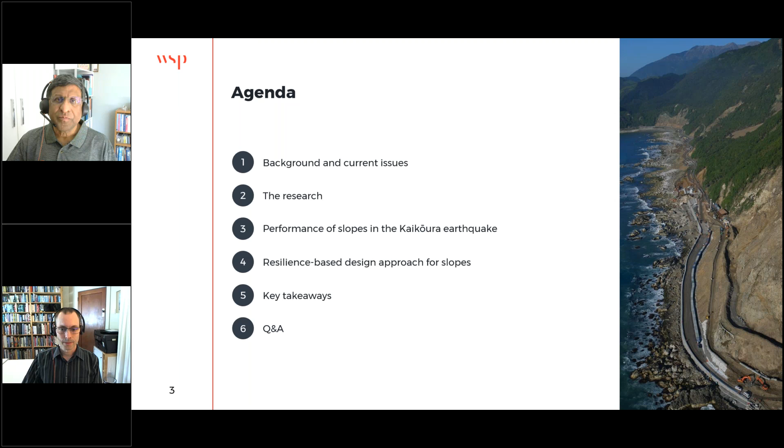So to begin with, just to set the scene somewhat, for those of you who may not be from New Zealand, we have a plate boundary running right the way through the middle of the country, which understandably causes us a few issues to deal with for our infrastructure. So because this is an active plate boundary zone, we've got high seismicity, and with the compression from the tectonic plates, we've got lots of uplift and erosion, and therefore rugged terrain. So all of our infrastructure, including transportation routes, towns and cities, are often formed on or near these slopes. And so the performance of these slopes in earthquakes, as well as other hazard events, is really critical for the resilience of our communities and our built environment.

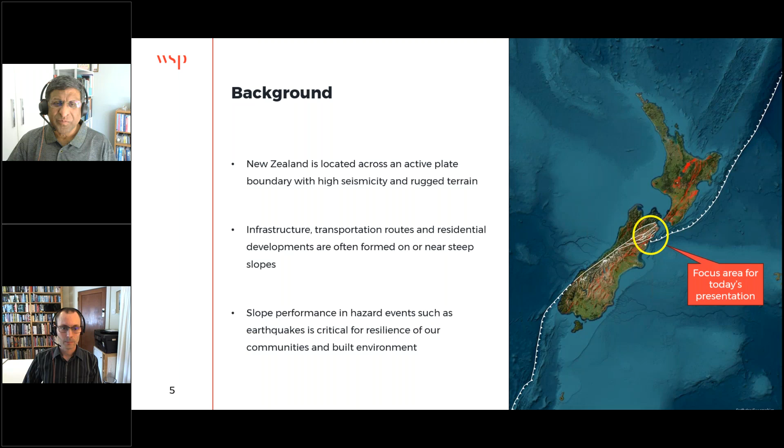So as you can imagine, with all of this active seismicity, we do get a lot of landslides and slope failures triggered by earthquakes in New Zealand, and as you can expect, these have caused a lot of damage, including loss of life and damage to infrastructure. But despite the demonstrated hazards posed by landslides and earthquakes, there are still some gaps in design practices for geotechnical features such as cut and fill slopes, and so that's really the focus for us today.

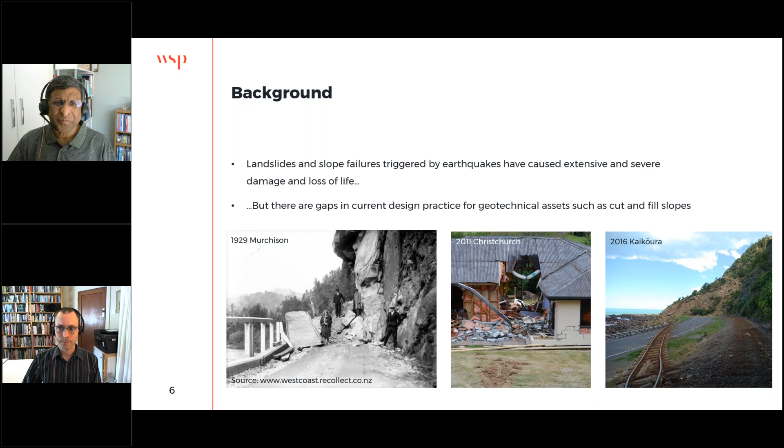So let's have a look at what our current and recent practice looks like. We have major infrastructure projects, not just in New Zealand but around the world, and often they require large earthworks, high cut slopes, and often near steep slopes. And that is definitely true here in New Zealand with the rugged terrain Doug talked about.

Design has typically involved traditional slope stability analysis, which was developed primarily in stable continental environments like Europe, and then modified and extended to do pseudostatic analysis, which we'll talk about later. Or design has been based on precedent, looking at how things have performed in the past. But we haven't had many events in the past 75 years until the last 10 to 15 years, so as a result there has been limited guidance or standards in New Zealand.

When we started this research, we looked internationally, and even internationally there is very little guidance for design of slopes for earthquakes. So we set out to understand this better. In particular, there was limited understanding of the slope failure mechanisms in earthquakes, because they're not always the same as what you get in other trigger events like rainfall.

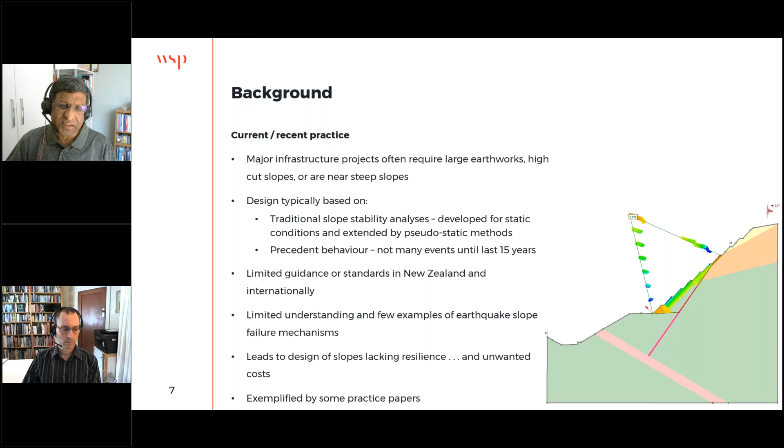This has led to a lack in the seismic design of slopes, leading to poor resilience, or sometimes unnecessary costs, because people were not recognizing the mechanisms and the resilience issues. So let's go to the next slide.

The gaps we saw which needed to be filled for improving our earthquake practice: we needed to understand the resilience of existing infrastructure in earthquakes, so that we can improve them and ensure our communities can survive and thrive.

The second thing is we needed to understand the slope failure mechanisms, as I mentioned, so that we could take that into account in the design.

We need good guidance on design, which is underpinned by the resilience context in which we are designing these facilities. And we also need to improve the recovery and associated outage times, because when you have a large earthquake, inevitably you'll have some failures. So we need to understand how we can quickly recover from that, and also design so that we can recover quickly.

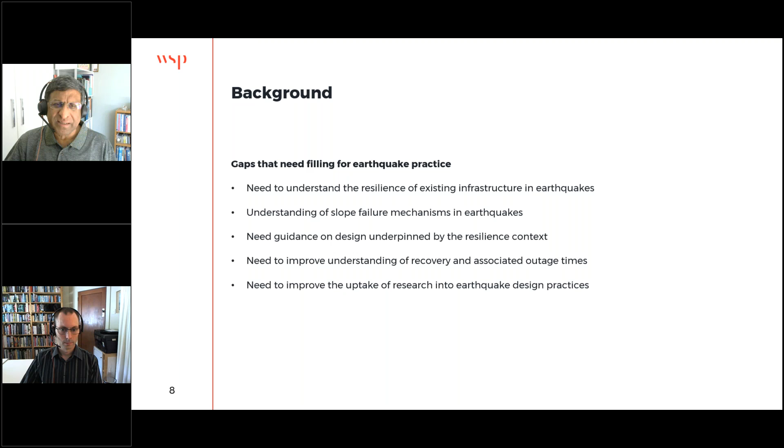And finally, we need to improve the uptake of research into earthquake design practices. Let's go to the next slide.

These are very useful for looking at landsliding on a regional scale, for susceptibility assessments and even for forecasting future events, but they're not detailed enough to be used for engineering design at a local scale or site-specific scale.

Some of the things that we need to draw in from research are the specific mechanisms of failure that are important for earthquake-induced landsliding, and how the ground shaking gets modified by the slopes, in particular by the modification of the slopes. So when you're cutting into a slope, how does that modify the response of the slope to ground shaking?

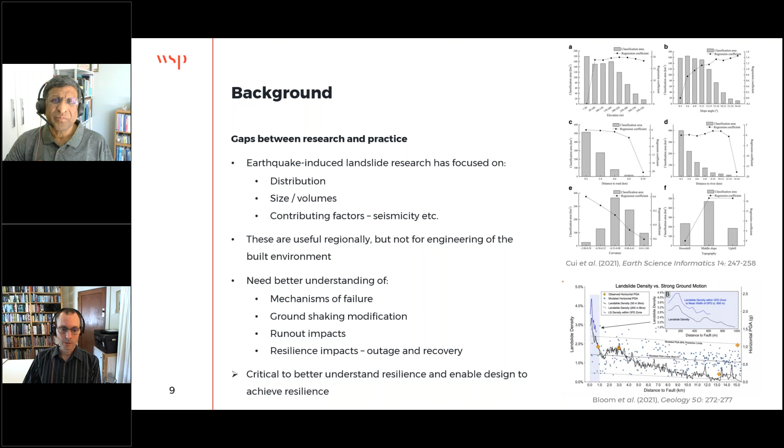All of these are critical to understand resilience holistically—not just what happens to a slope when it gets shaken, but what happens afterwards in terms of recovery and impacts, so that we can enable our designs to better improve the resilience of our infrastructure.

To put this in a bit more context, this is a piece of work that we did in the year leading up to the Kaikoura earthquake, so very conveniently timed, looking at the national state highway network and its vulnerability to high impact, low frequency natural hazards.

So on a network level, you can see what the consequences are of any one of these links being taken out by an earthquake.

This highlights the importance of slope failures in this part of the country for the resilience of the network, and what the consequences are for wider availability. If one section goes down, there aren't many detour routes available, and those go through fairly hazard-prone terrain themselves.

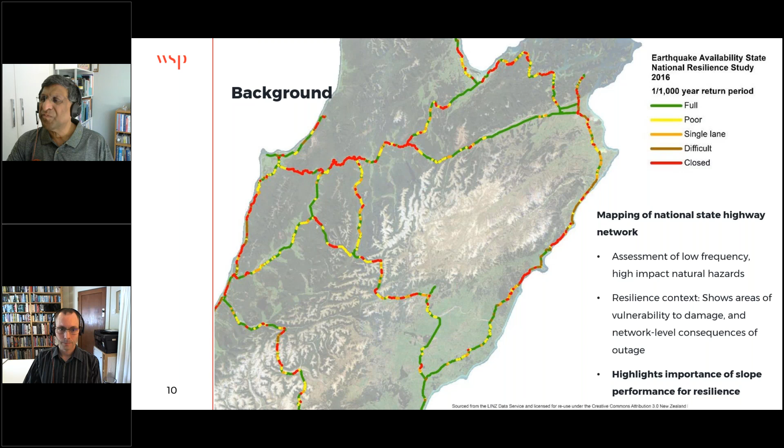All this was thrown into sharp relief when the Kaikoura earthquake happened. This earthquake occurred at 2 minutes past midnight on the 14th of November, 2016. It was a very large magnitude earthquake, 7.8, which involved a large number of faults over a wide area, so it's a very complex event seismologically. Correspondingly, there was strong ground shaking over this entire 200-kilometer odd distance.

This is a relatively sparsely populated part of the country, fortunately. It's very mountainous in this area, and it triggered a lot of landslides. That was the principal ground damage caused by the earthquake. There were only 2 fatalities, thankfully.

The major impact of the earthquake was that all of the infrastructure networks running along the coast through this area were severed by landslides, principally the road and the railway corridor which run along the coast. There was then a major rebuild starting straight after the earthquake and continuing for about 5 years.

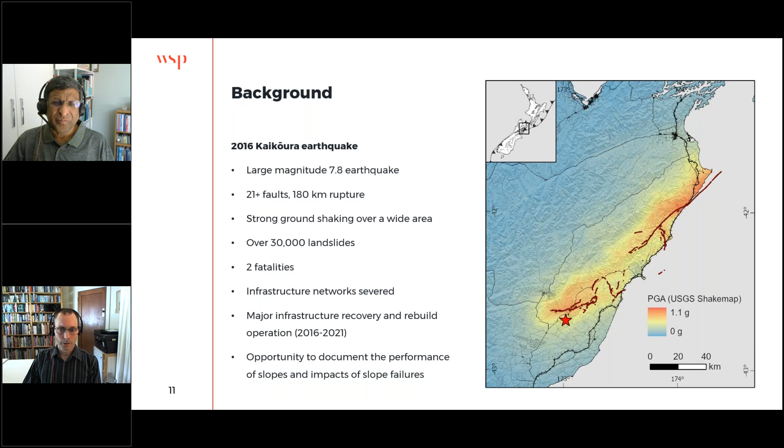This earthquake gives us the opportunity to document how engineered and unengineered slopes performed in earthquakes, and what the impacts of those slope failures are. It gives us a real good natural laboratory to investigate these sorts of aspects.

We actually started looking into this after the Christchurch earthquake of 2010 and 2011. The New Zealand Transport Agency asked us what issues we needed to be considering and engaged us to do research to provide guidance for the seismic design of slopes. So we developed this guidance you can see on the right-hand side, which was published in 2018.

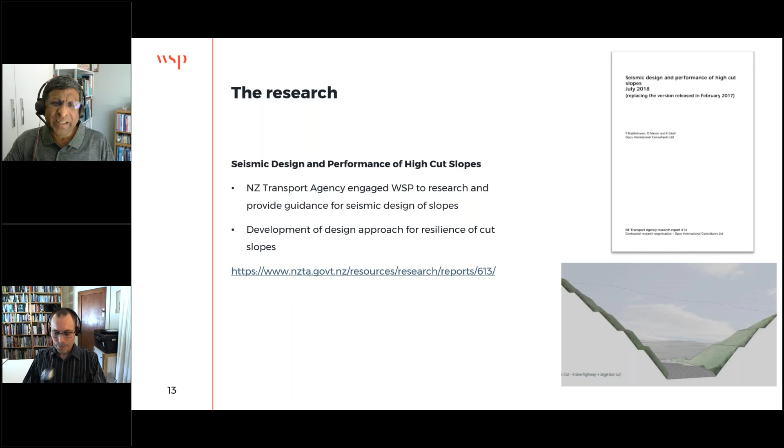Before that was finished, came the Kaikoura earthquake, as Doug mentioned. On the next slide, we were approached by the Ministry of Business, Innovation, and Employment, and Crown Research Institute GNS Science, to be part of a $9 million research program over 5 years to look at how landscapes respond to earthquakes.

There were 7 themes, and we led one of the key themes, which was the practical aspects, looking at performance of earthworks and the resilience of the built environment. The other themes were led by the Crown Research Institute and a number of universities. There was also an international science advisory panel to help us learn from and disseminate the learnings internationally.

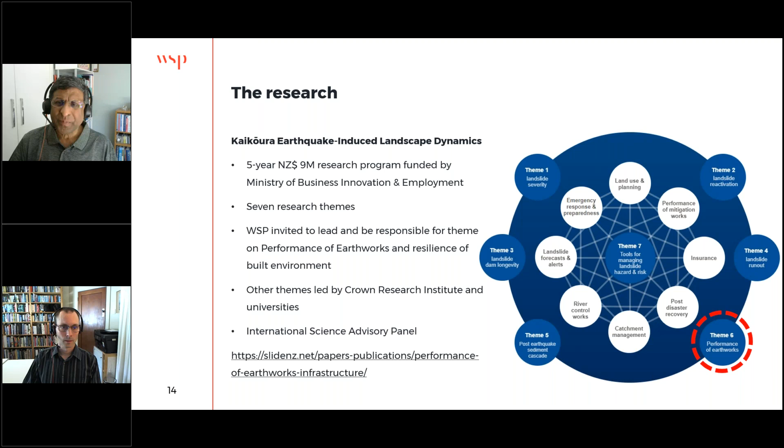Our engagement covered 5 things as part of this research. One is to map the landslides and understand the failure mechanisms and how they impacted the resilience performance of infrastructure. Then we selected and investigated some sites representative of different types of failures in more detail, and analyzed them to draw insights from these failures.

Considering all the mapped landslides as well as the insights from this detailed analysis, we developed guidelines for the design of earthworks. Then we set out to disseminate the learnings and guidance. This Global Snack and Learn webinar is part of that dissemination process.

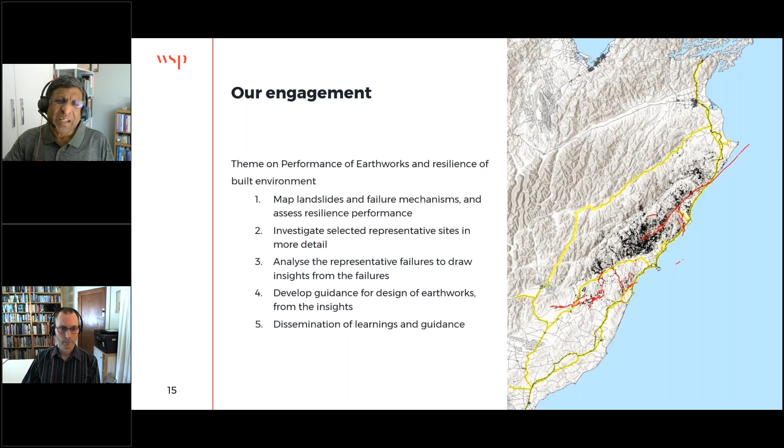The aims of the research were to develop recommendations for resilience-based design of slopes and associated assets, how we can manage landslides, and enhance the resilience of New Zealand's infrastructure through better knowledge of how cut, fill, and adjacent natural slopes perform in earthquakes, and how we can recover from major hazard events.

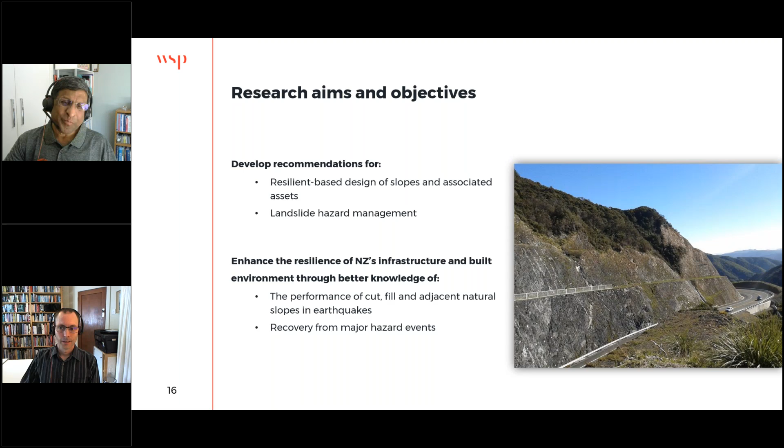Hand over to you again, Doug. Okay, thanks. So now let's get into a bit more detail of what actually happened in the Kaikoura earthquake. As I mentioned before, there were over 30,000 landslides triggered by the earthquake.

Because this was the main arterial route between Christchurch and Picton up the east coast, the only available detour route was through the Lewis Pass over the Southern Alps and then right round. So this added about 140 kilometers to what is normally a sort of 3.5 to 4 hour car trip.

Particularly for the trucks, which were then taking a lot more freight because the railway had been taken out of service, this added a lot of indirect economic impacts. And then on top of that was the rebuild, which ended up being about $1.3 billion, which was fairly significant for a country of New Zealand's size.

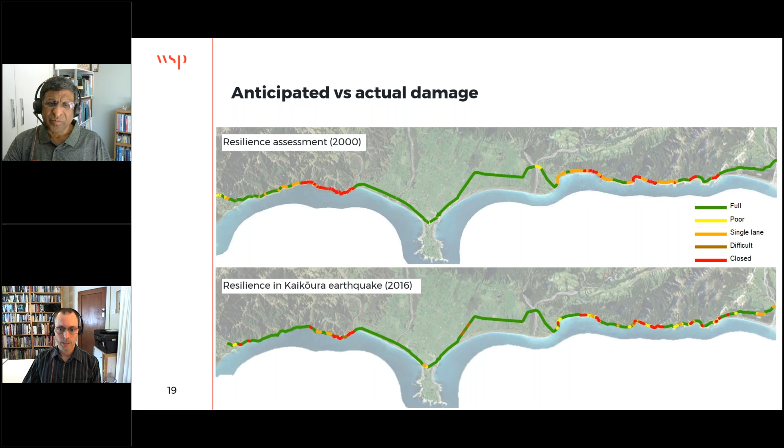Slope failures were the main form of ground damage that caused this prolonged closure of the state highway and the railway through Kaikoura. The types of slope failures and their impacts were influenced both by the topography, but also the form of the road or the rail.

The large landslides from high hill slopes were the ones that caused the biggest impacts. These resulted in large volumes of debris, which understandably took the longest to clear.

Slumps and rockfalls from lower slopes, particularly cut slopes, caused less disruption but tended to then require longer mitigation and stabilization work. Embankments were widely damaged, and while these didn't necessarily close access, you could still get four-wheel drive access across some of these types of failures with cracking. These repairs tend to take a lot longer for excavation and rebuilding the embankments.

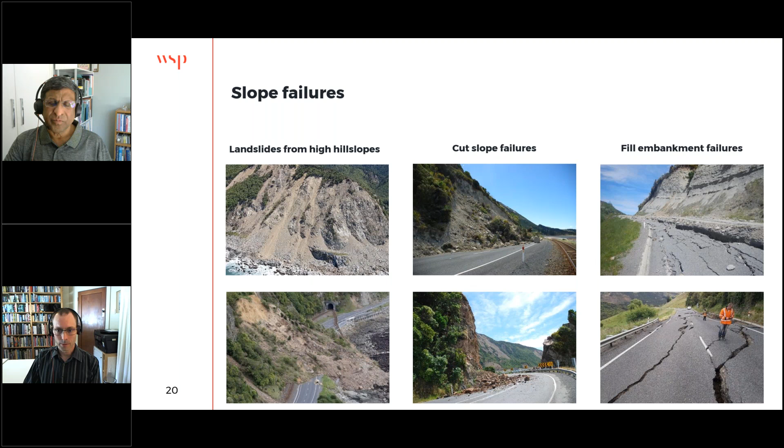So just to look at some of these different types in a little bit more detail. Cut slopes all over the study area were affected, so there's a variety of geology and different types of heights and angles of slopes.

The deeper seated, more structurally controlled failures in rock caused more damage, both from the larger volumes of debris, but then more impact from the need to construct slope stabilization measures or rockfall protection structures afterwards, before access could be completely reopened.

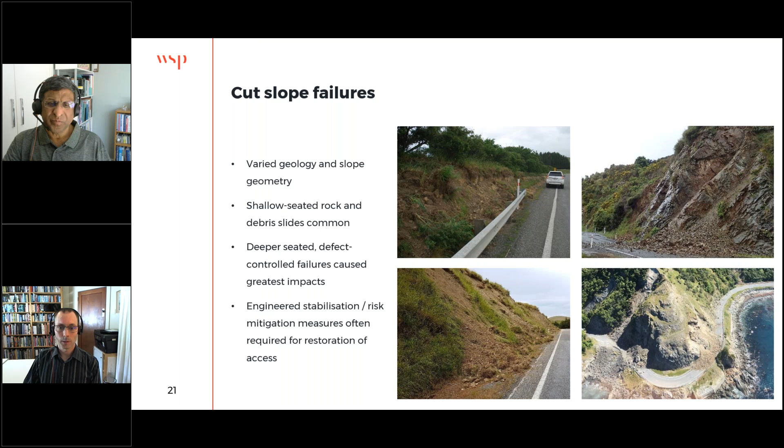Failure of natural hill slopes caused the most damage and disruption, and these tended to be dominated by rock slides and debris avalanches. These also had a range of volumes and impacts, from negligible, where debris didn't reach the transport corridor, through to really long duration closure.

The state highway through Kaikoura was closed for 13 months, and that was due to one of these debris avalanche, rock avalanche failures, which took a long time to clear access.

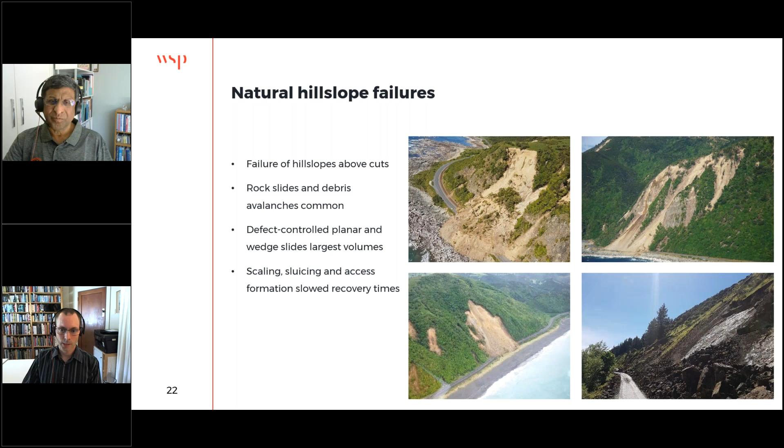This long outage was due to the need for scaling and sluicing to make the site safe before the earth-moving plant could get in to start clearing the debris to restore access.

There was extensive damage to embankments over about a 200 kilometre length of the study area, and the predominant modes of failure were consolidation, settlement, slumping of the edges of the fill slopes, and then displacement of the embankment as well as the underlying natural soils.

A lot of these were constructed in the late 1800s, and they were built by hand by cutting from one side of the road and tipping it onto the downhill side to form the bench.

Damage was particularly severe in the Hundalee Hills, in this area here, where the road crossed pre-existing landslide features or infilled gullies.

Settlement of fills at bridge abutments was also common, and this prevented access even if the bridge was actually undamaged. There wasn't much liquefaction in the earthquake, unlike, say, Christchurch, but there were a few places around Kaikoura and Blenheim and low-lying areas where embankments were damaged by liquefaction or spreading.

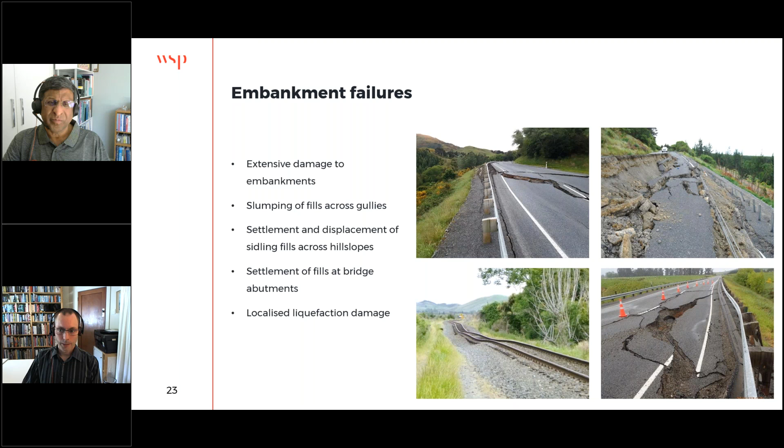I'll just touch quickly on retaining walls. This wasn't a focus of this research as such, because there is some guidance for earthquake design of retaining walls, but it's still useful because these were often constructed alongside or within embankments, so the performance of these and the performance of embankments was important for overall access.

As you might expect, recently engineered and constructed, particularly anchored retaining walls performed well, and gravity walls that were unengineered and unreinforced performed poorly. The dominant types of failures were from overturning, with a couple of examples shown, as well as some translation as well.

Often these were built, for example this type of situation, single height gabion walls built to improve the safety of the corridor, to allow guardrails to be constructed. But then in the earthquake they caused more damage than if they hadn't been there, because they tended to drag the road surface with them, causing more extensive cracking and damage than otherwise.

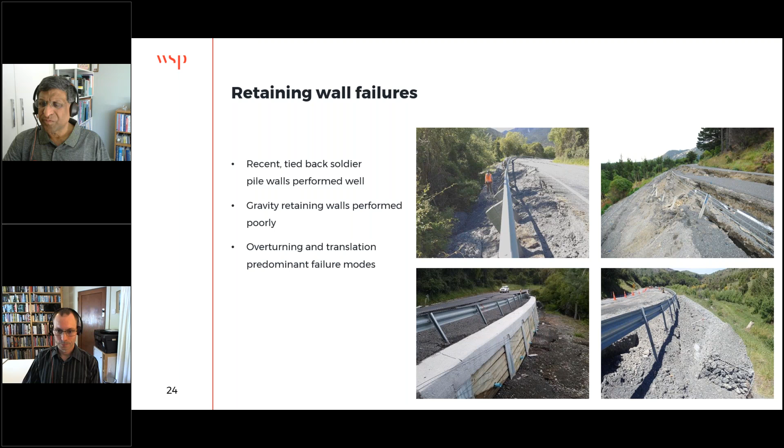As Barbara mentioned, our scope for this research was to map the failures that occurred and investigate some key ones, analyzing those to understand what the key factors are that drove the performance.

Some of the important issues we've identified that we need to consider in a local or site-specific assessment are highlighted here. Firstly, what are the appropriate seismicity parameters to use in an assessment, and how do we account for amplification of the ground shaking?

The second is to understand what the material properties of the slope are and how those will behave in response to deformation during the earthquake. And then thirdly, what are the realistic or appropriate failure mechanisms to use?

Those three really cover the initiation of failures, and so that's what we might typically do for a design of a cut slope, for example.

But observation from Kaikoura also shows that it's not just the failure initiation we need to be worried about, it's the consequences afterwards, and those aren't necessarily well covered in design approaches.

So we need to understand what the mechanisms of transport and run-out of landslides are, and these will differ depending on the failure mechanism.

We also need to consider what the post-earthquake damage state of the slope is likely to be and what sort of hazards might exist after the earthquake.

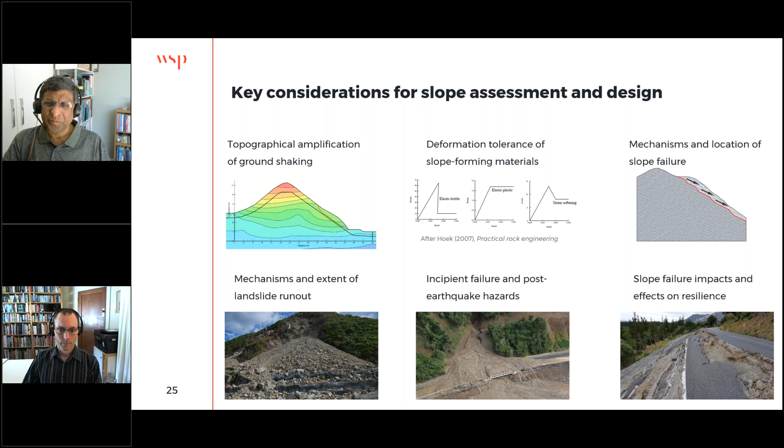Some of the high-level key observations from that - let's explore those in a bit more detail now. Failure mechanisms: just highlighting a couple of the key ones.

Rock mass failures were widespread in the Greywacke Hills, which, for those of you who might be from overseas, is a common basement bedrock across New Zealand. It's very highly fractured, very intensely fractured, and can be completely weathered in the upper parts of slopes.

Many shallow failures occurred on these materials in these situations, tending to be shallow-seated in the near surface zone of weathered rock, as well as in weaker, more younger rock materials. Importantly, these tended to show quite brittle behavior.

They initiate as sliding and tensile release along these very closely spaced interconnecting joints. Then as the displacement continues, they lose strength and collapse, becoming debris and rock avalanches as the failure mass disaggregates. These were the types of failures that caused the most significant disruption and damage to the transport corridor.

Just as a note for what Brad will come to in a little while - because these occur on natural slopes, unmodified, they're not necessarily something we may deal with in design as such, but we need to think of ways to mitigate the effects if they occur. It's part of an assessment approach we need to consider, even if we're not going to be cutting into or building on top of these slopes themselves.

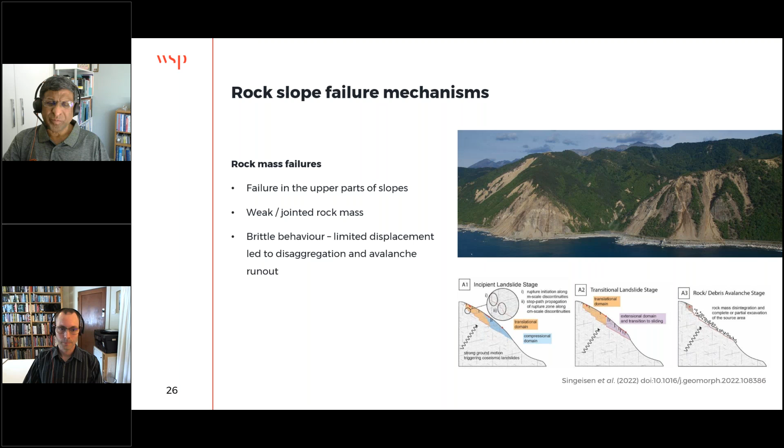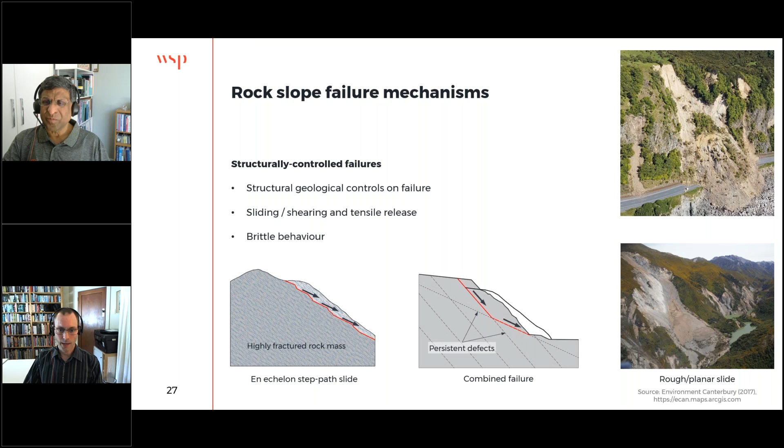Structural geology plays a very important part on the mechanism of failure. Some important examples are en echelon step-path failures, consisting of sliding on unfavorable outward dipping joints separated by failure across shorter persistence, more steeply dipping steps. Then there's a combination of sliding on persistent planar defects and shear failure, either through a secondary defect or through shearing through weak rock mass at the base of the slope, as well as planar sliding on persistent discontinuities such as bedding, or in this case, a fault plane. These types of failures also showed brittle behavior, with large runout causing extensive impacts. This really underlined the need to understand and characterize the structural geology of a slope so that these failures can be assessed appropriately.

The common failure mechanisms of fill slopes in Kaikoura were settlement and displacement of the slope crests and slumping of the fill and underlying soils. This manifested generally as cracking and displacement of the road surface and slumping of the railway ballast. The cracking along the roads tended to be quite quick to reinstate for emergency vehicles, either by using temporary fill or by just excavating and releveling the surface. This shows that a standard approach of designing embankments to allow for displacement is appropriate, provided, of course, that this is backed up with good quality construction, supervision, and regular maintenance of things like culverts and drainage.

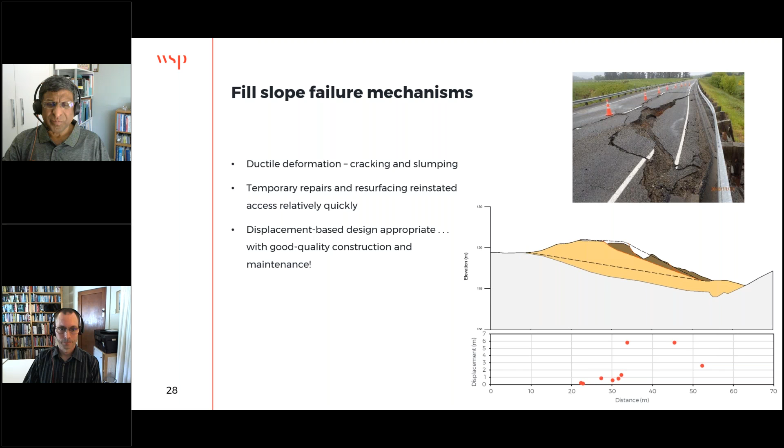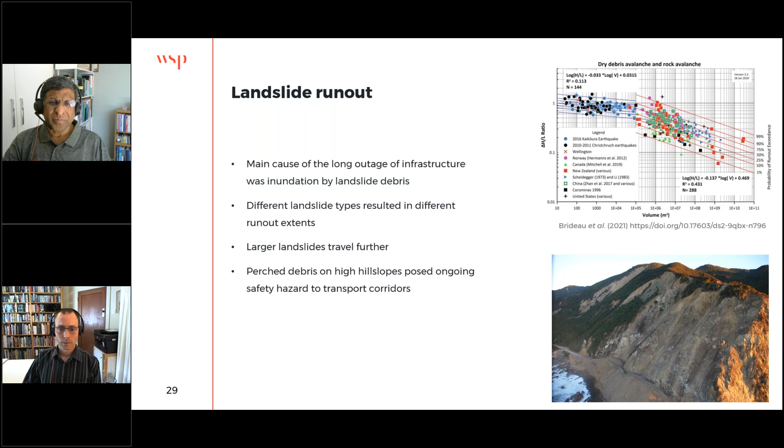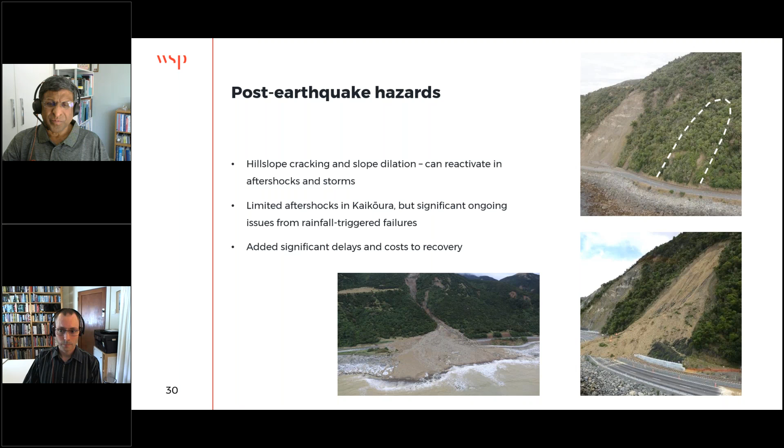So now hand back to you, Brabha.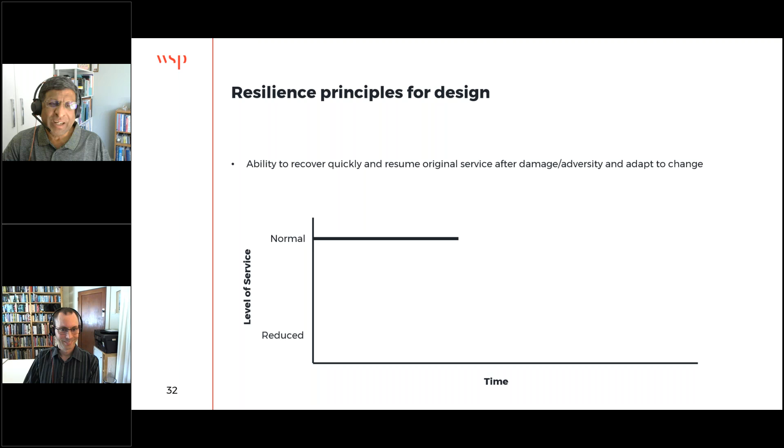Okay, thank you, Doug. I'm going to give a brief overview of some of the resilience principles for design we have developed. The ability to quickly recover and resume original service is a key aspect of resilience - being able to recover functionality. We have developed this diagram, which Doug's going to show. We have a normal level of service, then comes an event, and that leads to a reduction in the level of service or functionality.

And then it takes some time to recover functionality back to the original level. Sometimes we can do better, or sometimes we have to accept a lower level of functionality because of the damage. This pink triangle indicates resilience - the smaller the triangle, the greater the resilience. That could be by a combination of reducing the loss of functionality or being able to recover quickly.

But in reality, we don't get a linear recovery. Often we can recover some functionality, and then it takes more time to recover functionality in stages as we carry out the work.

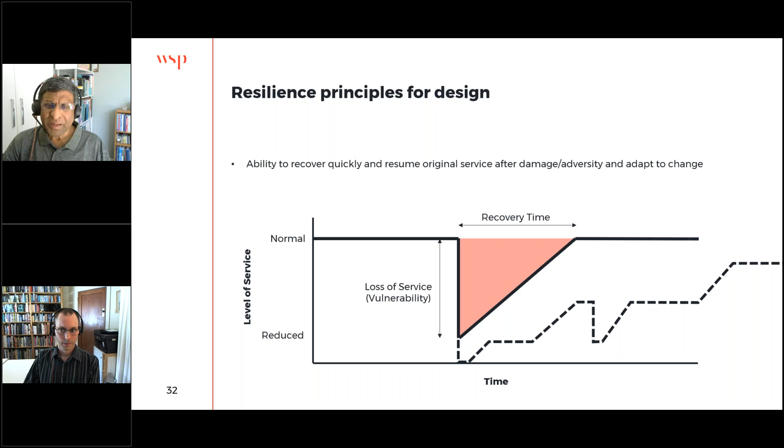In terms of design, we used to do just life safety design. The focus of earthquake design was on life safety because a lot of people died. Then we moved on to consider displacement, so we were able to do displacement-based design, like Doug mentioned, for embankments. And then later on it evolved to look at performance, because displacement itself doesn't mean much - how does it affect performance?

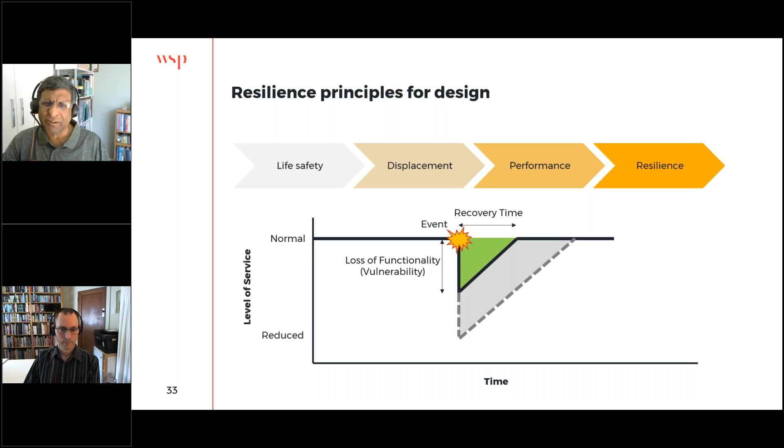Through this research, we are proposing a more resilience-based design - so it's not just performance, but functionality and ability to recover quickly, which matters.

Early focus on resilience is crucial to achieving good resilience. To do that, we need to understand the resilience context. As Doug showed, if we are looking at a transport network, we need to understand the resilience of that network so we can see how important our particular section of road or rail is.

Other infrastructure - we want to try and avoid and limit failures where possible and reduce vulnerability, combined with improving the recovery process so we can quickly return back to service. So we need to make some informed assumptions in our assessments.

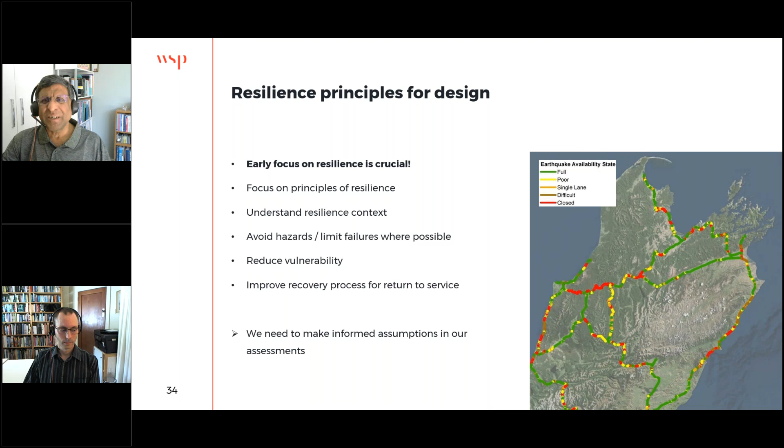In our report from research, we have proposed a number of resilience-based design approaches. One was to consider the importance of that particular infrastructure. On the right-hand side, you can see different levels of importance defined based on the functional needs of that infrastructure, and that sets the resilience expectations for what we are going to design.

The next step is to look at what approach to take for the design, and that depends on how important the resilience is. So we define low to high levels of resilience expectation, and depending on that and the importance level, we choose different design approaches consistent with that.

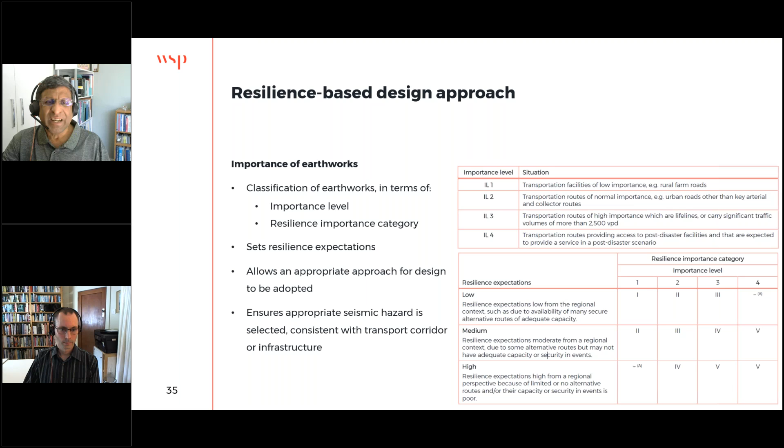We need to look at the impacts of the slope failure, and Doug talked about the runout. This is an example where, based on the learnings from this research, we looked at the runout from landslides along this coastal highway, and based on that we were able to come up with recommendations for improving the resilience of the highway, such as improving the alignment.

So you can see how the research outcomes could be used. At a high level, we want to avoid the potential hazard, try and enhance redundancy in the network, and select appropriate forms that reduce the potential for damage and allow faster recovery. More ductile performance, like embankments, enables quicker recovery compared to more brittle mechanisms and big failures. Then we can focus on strengthening key vulnerabilities.

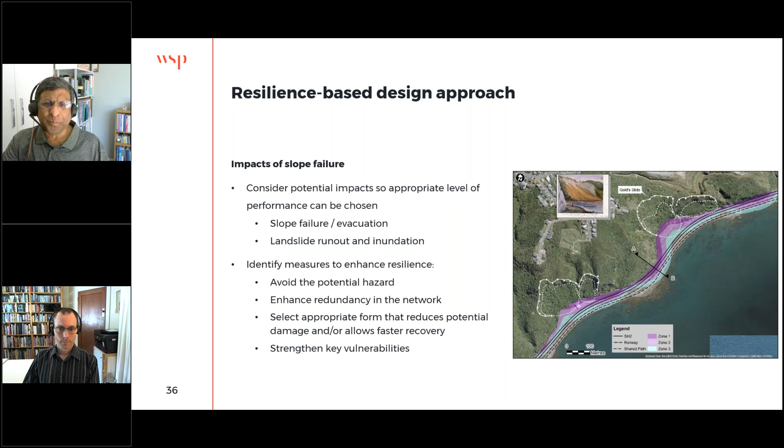The resilience-based design approach looks at increasing complexity of investigation and analysis based on the importance of earthworks - choosing pseudostatic equilibrium methods for low consequence earthworks, then permanent displacement analysis for moderate performance requirements. If we need higher performance, we might look at more sophisticated stress deformation or time history analysis for major slopes or severe consequences.

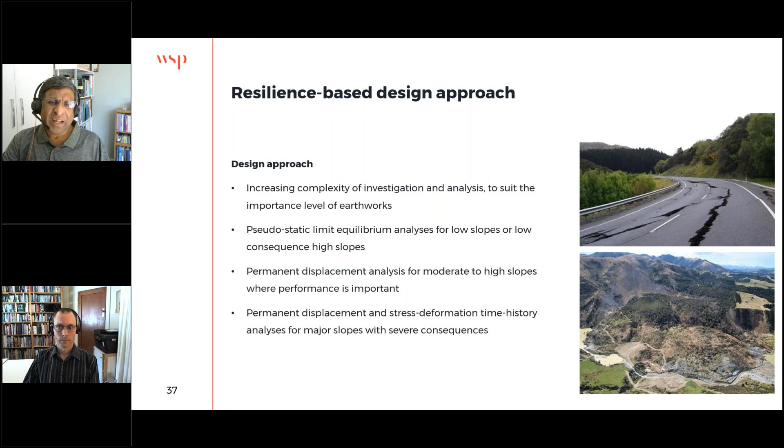Depending on the slope angle and slope height, we provide some recommendations as to how much more amplification we need to allow for.

The third aspect is to allow for incoherence of motions. The way ground motions affect slopes, not all parts are affected equally at the same time, so we need to take that into account when we design slopes. We provided recommendations for how much shaking to consider in the upper quartile of the slope, where most slope failures are initiated, as you saw from Doug's presentation. If we're looking at larger failures over the full slope, we use a reduced ground acceleration, because the ground acceleration won't be the same over all heights of the slope.

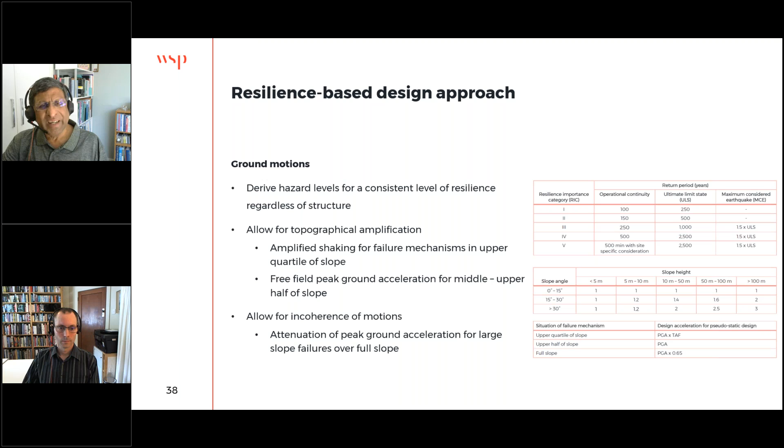It's important to look at slope performance. We want to avoid large failures which can close the infrastructure for long periods, because quick recovery is important. But we can accept small failures which can be cleared quickly because they don't have a big impact on functionality. That enables focus on the large failures and savings in allowing smaller failures.

For ductile behavior of materials like embankments, we can use a displacement-based design to look at how much displacement we can tolerate, and therefore recover quickly. But for brittle materials like rocks, we need to be really careful, because even small displacements can lead to reduction in strength and therefore loss of functionality.

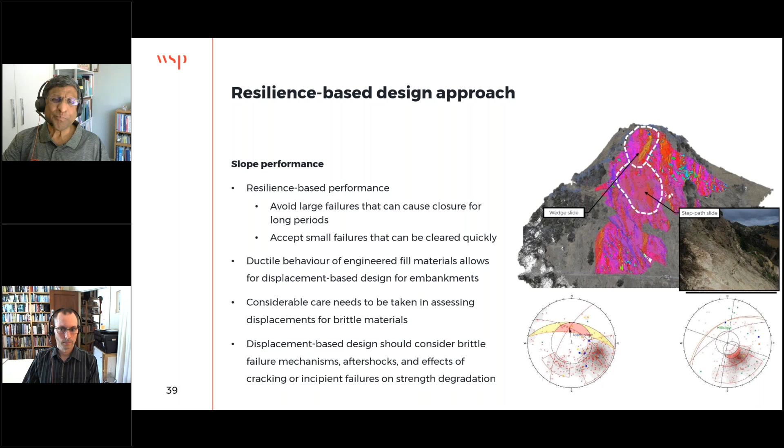In addition to this, we also need to look at rockfall risk, because that poses a safety hazard. We recommended measures like use of benches, rockfall fences and catch pits. We also need to consider safety during the design using a safety-by-design process, as well as safety during operation and during aftershocks after an event.

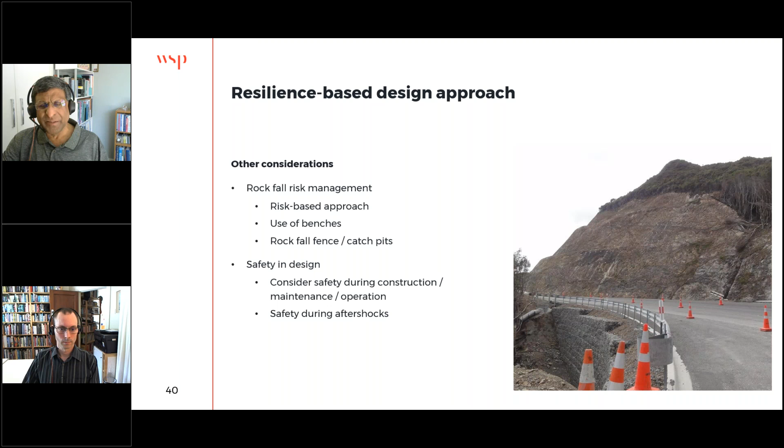The key takeaways of this research: a resilience-based design approach is highly valuable for the development of economical and sustainable solutions that focus on functionality and recovery of infrastructure.

We need to be careful about brittle failure mechanisms, particularly rock slopes, and consider that they cannot accommodate a lot of displacement before failure. A displacement-based design is appropriate for fill slopes, but we need to consider how much displacement is tolerable before you get too much failure.

We need to look at the mechanisms of landslide runout during an earthquake, as well as what could happen in post-event scenarios, where storm events could mobilize materials disturbed in the earthquake. A resilience-based design should be assessed and used to design networks, and this will enable us to design more resilient infrastructure.

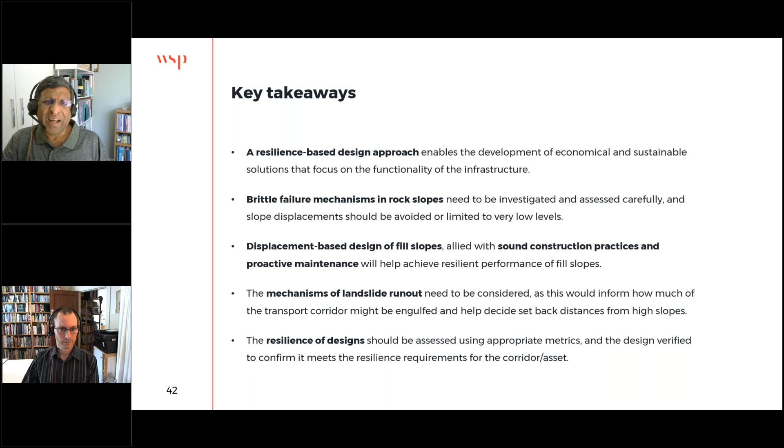Before that, note that in a couple of weeks' time there's the third of our webinar series, which will focus on landslide hazard mapping and how that can be used to improve the resilience and response for our infrastructure. Over to you, Sharon.